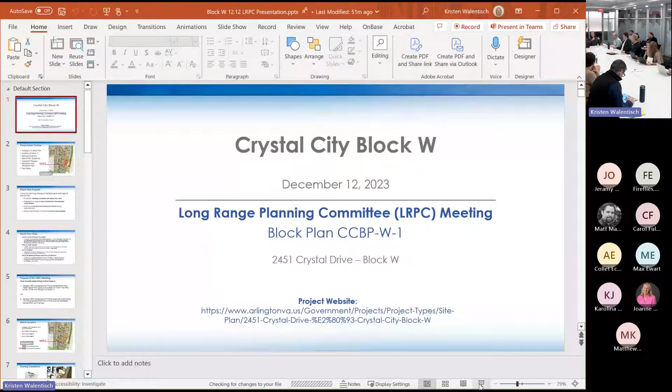Why don't we move then on to the staff's presentation for this meeting? We have one more person who came in—introduce yourself. Thank you. Okay, staff, it's all yours.

Okay, great. Thank you, Commissioner Lantelmi. All right, so we are here to look at the block plan for Crystal City Block W.

Prior to the outline for staff's presentation for this evening, we'll look at the purpose of the block plan, the location of Block W specifically, existing conditions on the site, sector plan guidance, the applicant's development proposal, deviations from the sector plan, and next steps, timeline, and schedule.

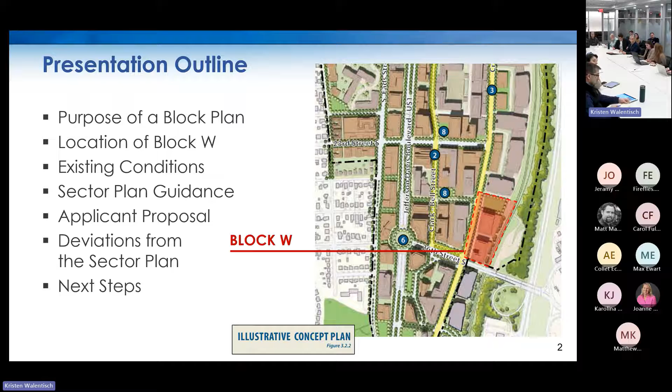You can see in the illustrative concept plan from the sector plan that Block W is located in the shaded area. We'll have a little more information on that, so I'll keep going.

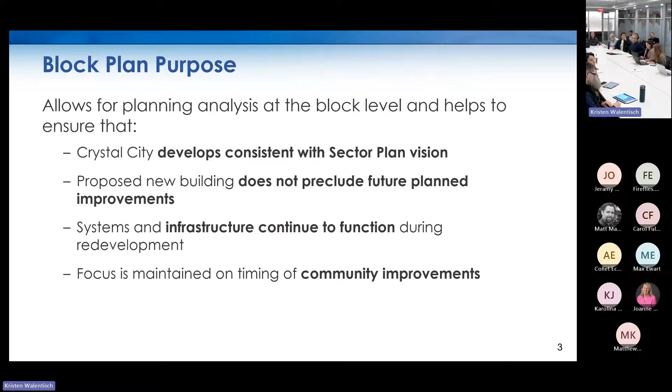Just to review, the purpose of the block plan is to allow for planning analysis at the block level and help ensure that Crystal City develops consistent with the sector plan vision. Proposed new buildings do not preclude future planned improvements. Systems and infrastructure continue to function during redevelopment, and focus is maintained on timing of community improvements.

Just to summarize this slide, what is a block plan? It's a general long-range plan for a single block in Crystal City, for properties east of Richmond Highway. Tonight we're looking at very general aspects of the block plan, mostly related to open space and transportation. There will be a corresponding SPRC process after this LRPC process, which will include more site-specific recommendations. This block plan is required because it's east of Route 1 in Crystal City and is required by the sector plan.

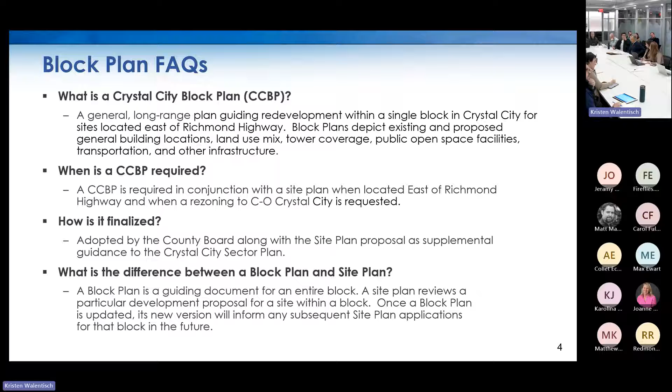For tonight, interpret this loosely: LRPC should be working towards determining whether there is either A, general consensus that the proposed block plan meets the sector plan goals and is ready to inform the SPRC, or B, consensus that there are major issues outstanding with the proposed block plan. This is not black or white. One is not meant to give a green light for the project, and the other is not meant to completely halt it. But generally we want you thinking of one of these two options while you review the proposals tonight.

Looking at the block plan location, it is in the South End district within the sector plan. It's east of Richmond Highway, north of 26th Street, south of 23rd Street, and it is identified as an anticipated redevelopment site in the sector plan.

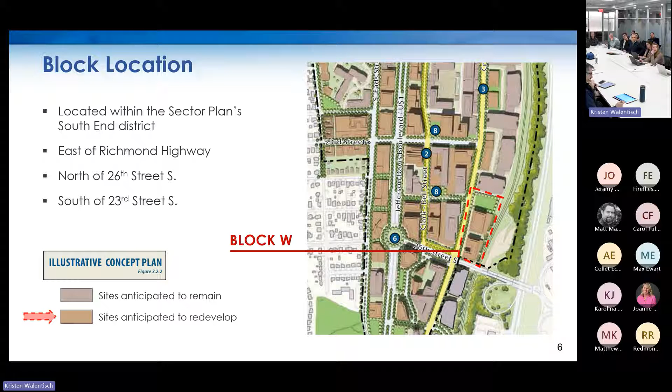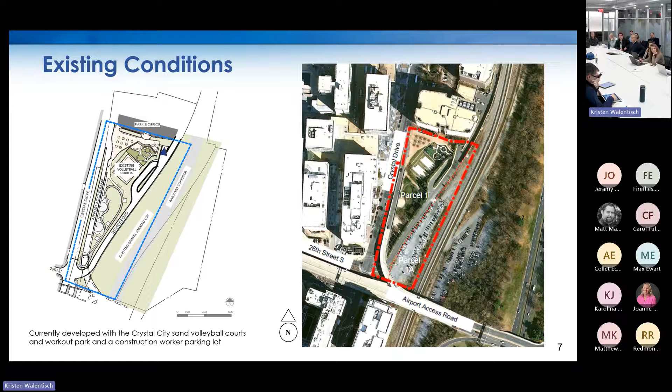The existing conditions: this is the site of the existing Crystal City sand volleyball courts you may be familiar with. There are also additional workout features and a workout park on this site. There is a service road that cuts through mostly the center of it, running north to south. And there is an underground tunnel that connects to a parking lot that JBG owns, manages, and maintains, used for construction worker parking. We can look at that in more detail.

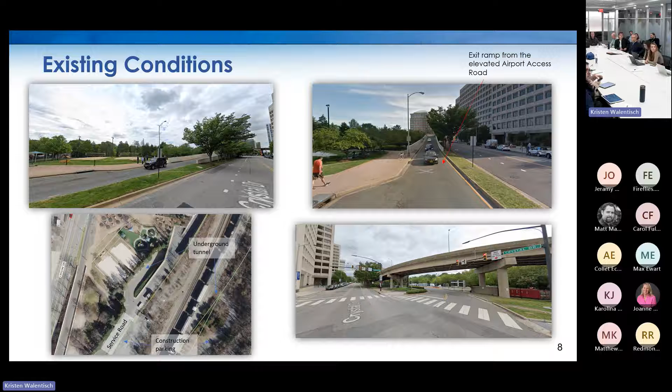Photos of the site, going clockwise from the upper left: you can see the sand volleyball courts. In the next image, the exit ramp of the airport access road that is above grade, coming to grade as it reaches Crystal Drive. In the lower right corner, you can see that airport overpass, elevated, with the service road going underneath it. In the lower left image, that's an aerial view of the service road as it connects to the underground tunnel, which goes under the railroad tracks, as well as the construction worker parking on both sides of the railroad tracks.

For the development proposal: it's a rezoning to CO Crystal City block plan, as we looked at, and why that's required. A site plan amendment to remove some of the site area for Block W from site plan 167, as well as a new site plan for a 7-story mixed-use building with 370 residential units and about 3,000 square feet of ground floor retail.

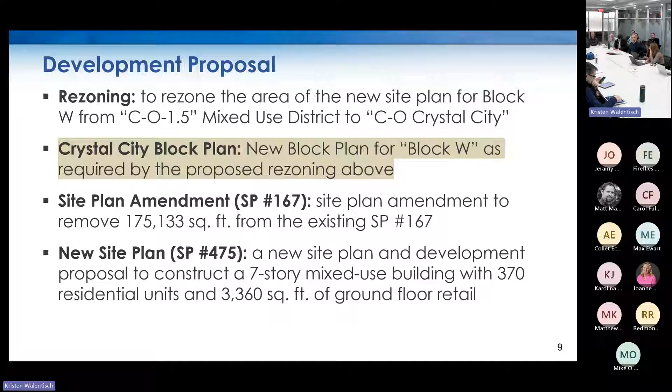Looking at that in a bit more detail, some of the development tabulations of note here: the parking ratio is about 0.5 spaces per unit, and the proposal includes provision of open space of about 35,000 square feet.

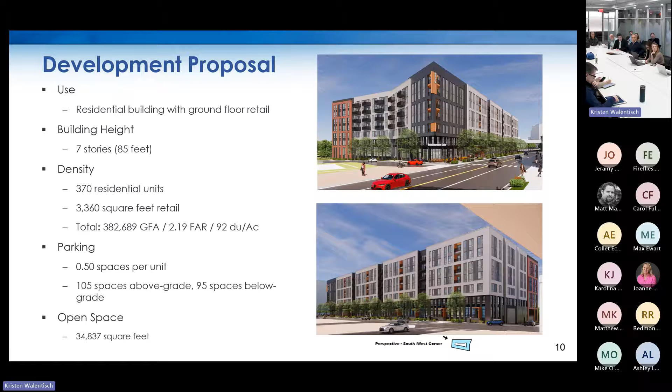Moving into sector plan guidance for the building heights map, the sector plan permits a maximum building height of 200 feet here. The proposal is at about 85 feet, so it's not a deviation from the sector plan guidance, but there is a large difference between the proposed and the recommended.

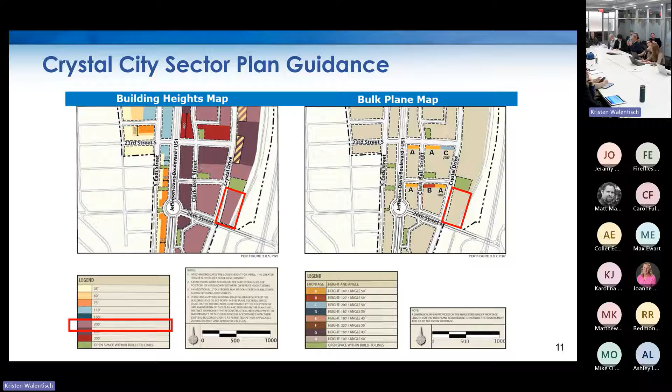Looking at the bulk plane angle map, there is no recommendation specific to the site. For the build-to lines, the sector plan shows a 115-foot building face-to-face distance, however at certain pinch points, 98 feet is permitted. And for street network, there is a type A retail-oriented and mixed-use oriented arterial street along the Crystal Drive frontage adjacent to the project site.

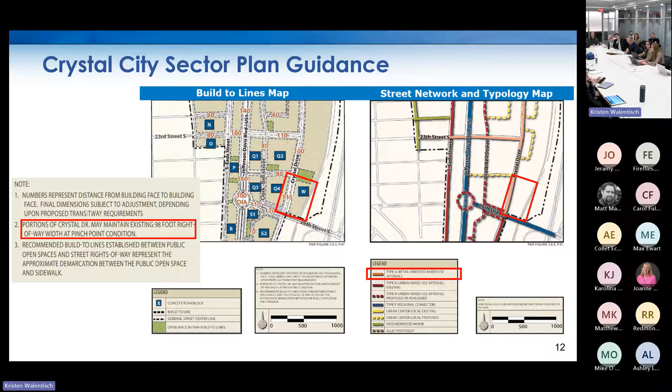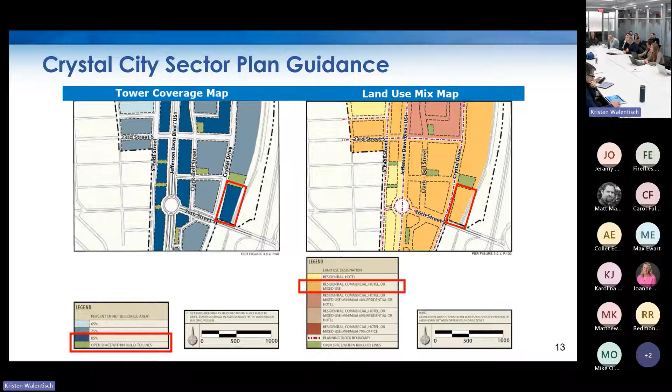For tower coverage, the sector plan prescribes 85% of the net buildable area. And for land use mix: residential, commercial, hotel, or mixed use.

For public open space, you can see there is an open space. It's hard to see from here, but that's public open space number 13 in the sector plan, which is Crystal Park. On the slide that follows this, a bit more detail on that. And for retail frontage, the northwest corner of any proposed building on Block W does require retail on that location.

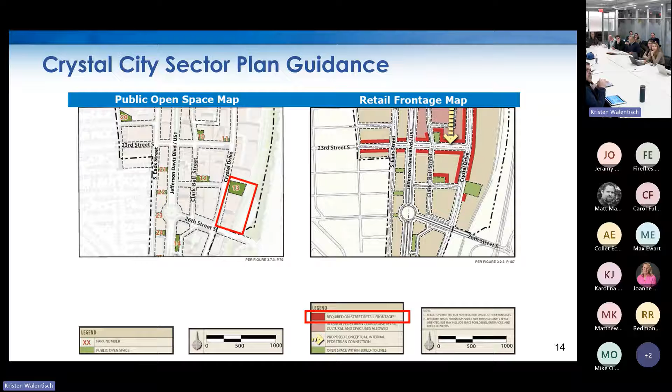Looking a little more at the open space, you can see the illustrative plan from the sector plan as well as some of the policy requirements, which includes meeting a minimum open space area of 38,000 square feet. This site also currently includes a childcare center playground, so we will have to discuss the relocation or reincorporation of that into the park at some point if that's decided. The active uses were mainly recreational for the park use.

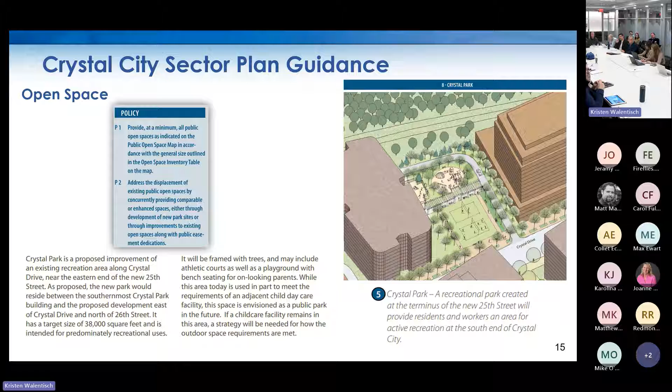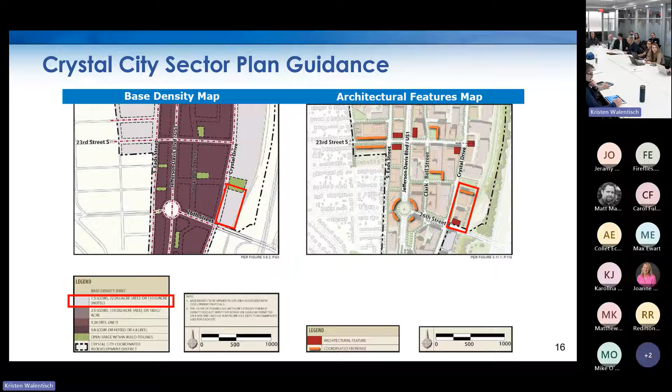Looking at architectural features, the sector plan prescribes a coordinated frontage on the northern facade facing the open space and an architectural feature on the south. The sector plan defines an architectural feature as something that can range from a special corner treatment to a complete building tower. A coordinated frontage is described as something that should mutually respond in massing, materials, and architectural language to visually unify the common space or street they frame.

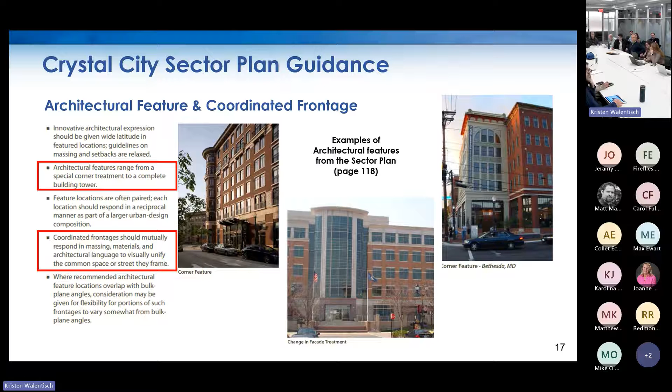We will be discussing both of these aspects more at the SPRC level, since they are more architecture and site specific. Just want to flag it for you now. That is the recommendation sector plan.

Looking at the surface transitway map, the sector plan does envision a proposed transit stop in the northwest corner of Block W. And looking at the service and loading map, the sector plan does identify the eastern frontage, which is the side of the building adjacent to the railroad tracks, as the generally preferred frontage where loading, service, and garage entrances are located on a street. So that's to note because we'll be looking a lot at that this evening.

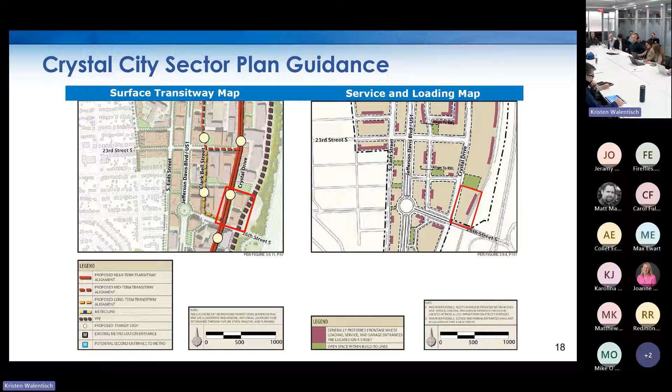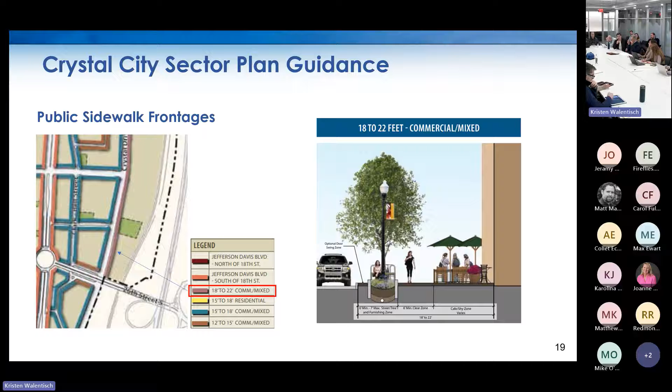Finally, for public sidewalk frontages, the sector plan prescribes 18 to 22 foot width along Crystal Drive for commercial and mixed use. I'll pass it over to my colleague, Matt Matuzik, to look at the sector plan deviations.

Thank you. Good evening, everybody. This is actually a great starting point that the entire review process can be based on. Given everything you just heard, where does staff see any kind of deviations in front of us to what the sector plan is anticipating in that particular block and on this site. So on the next two slides, we wanted to give you a very robust and comprehensive summary of our assessment right now of that proposal, and then go into specific details of the key deviations we wanted to highlight for this discussion.

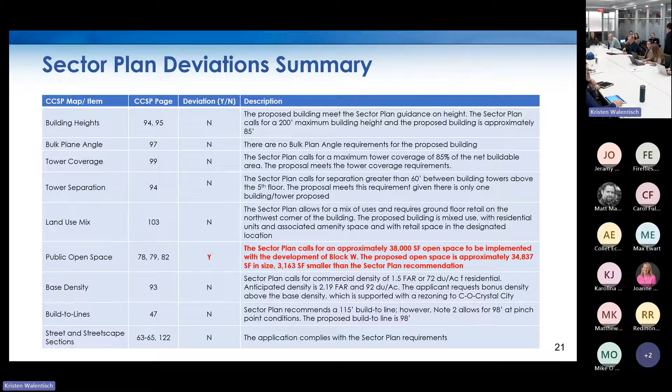I'm not going to read through all of these, particularly at that scale, but the ones in red are where the deviations occur. You'll see a yes in that third column. On this slide, the open space deviation we have is fairly minor, more of a size issue. There's obviously the intent of meeting the open space requirement. We want to verify that the sector plan anticipates a certain size, and can we make further evolutions to the design to ensure that this can still be achieved. On the next slide, we have several others that deal with the transportation side of the equation, both from a loading, transit, and street network perspective.

So in some sense, we're having a conversation that at the same time could happen at the SPRC level. But beyond the requirements of conducting, reviewing, and approving a block plan here, we want to make sure that if there are any fundamental issues we think should be addressed, that happens now, so that when the SPRC process begins, it has a much better starting point, and some of these items are more in alignment between the county, the community, and the proposal. We want to start that conversation and see where we go after this evening.

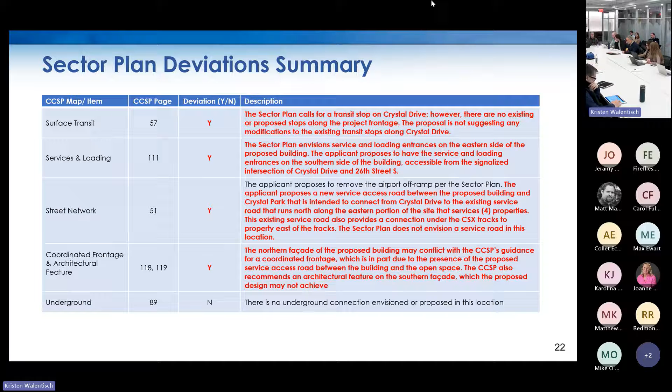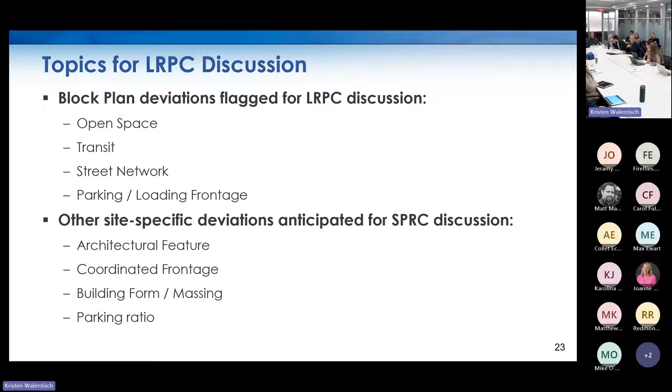The next couple of slides get into the specifics of some of these items we mentioned. We're not going to cover all of them because, as Kristen mentioned, a lot of these are meant to be SPRC site specific, but to the extent we can cover the transportation and public space elements that typically speak to the block level assessment, we wanted to accomplish that tonight. So I'm going to cover the first one, which is open space.

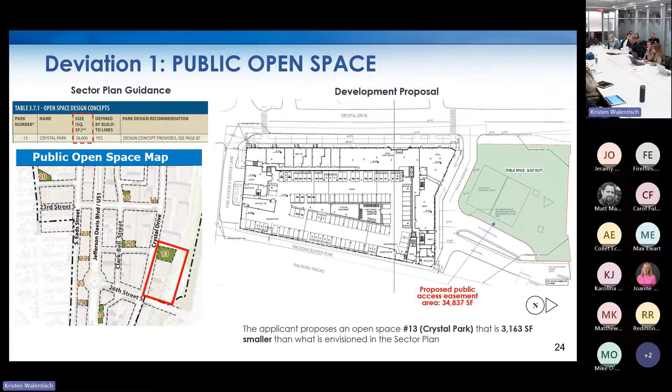You can see the comparison, the same exhibit we showed earlier, with the planned open space and what is currently proposed with the application in front of us. There's a minor deviation in the total square footage of the area, given where the additional service road is introduced from Crystal Drive. Sergio is going to cover the next couple of slides dealing with those transportation related deviations.

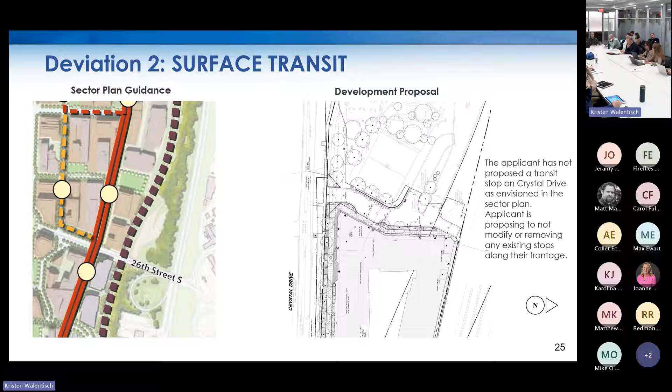Thanks, Matt. So the first deviation is about surface transit. The Crystal City sector plan calls for a transit stop along Crystal Drive, adjacent to the site. The applicant has not proposed a transit stop there. It's also not modifying or removing any existing stops along Crystal Drive along its frontage.

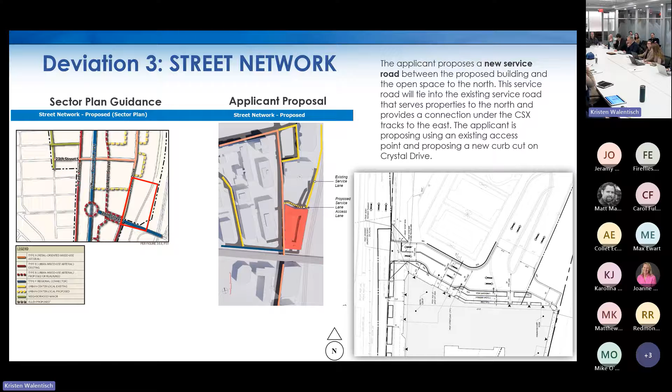And lastly, the Crystal City sector plan calls for loading and garage entrances to be on the eastern frontage of the site. The applicant has proposed its services to be on the southern frontage, with access through a signalized intersection that exists at Crystal Drive and 26th Street South.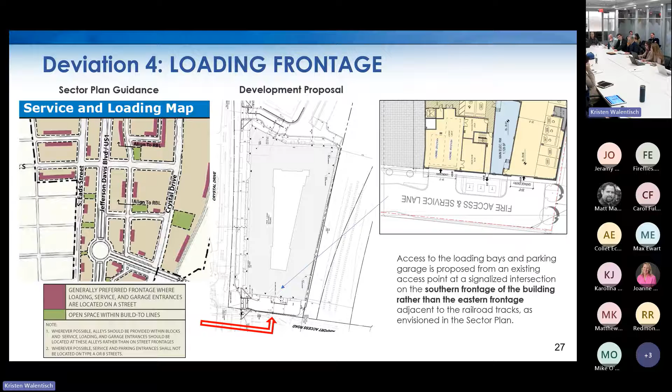So that concludes staff presentations. We'll turn it over to the applicant team to present.

I'm going to go to the next slide. I think we'll probably have very similar images, Chrissy, in terms of the site context, so please bear with me, you'll be very well aware of what's going on by the end of this presentation. As we mentioned, Block W is located on the southern end of Crystal City, on Crystal Drive, north of 26th Street and south of 23rd Street. It contains essentially, as Matt mentioned, one development site within the block, as well as Crystal Park to the north.

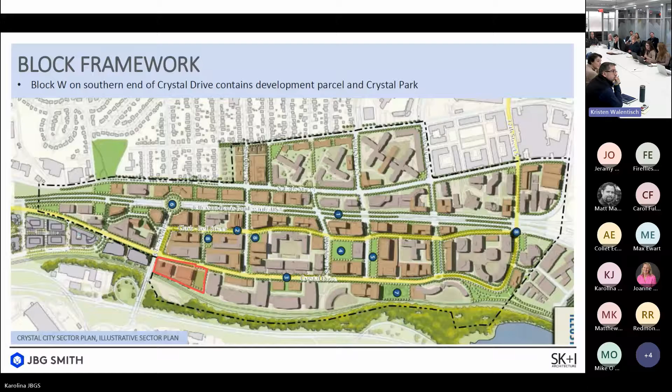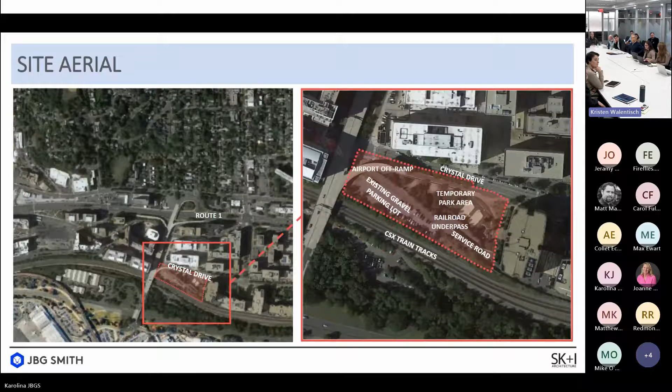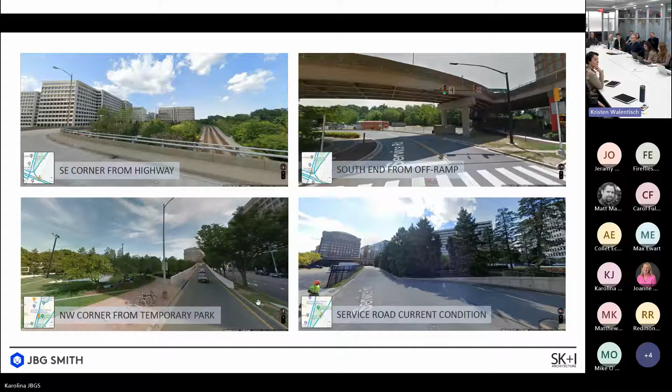Here we have some pictures of the site context. Similar to what Steph mentioned, you have the corner from the highway, the southeast corner you see there, currently over our site. On the right-hand side, you see the south end off-ramp where our loading will be located, or we're proposing it to be located. You see the northwest corner where the temporary park is, and then the service road currently and the condition there.

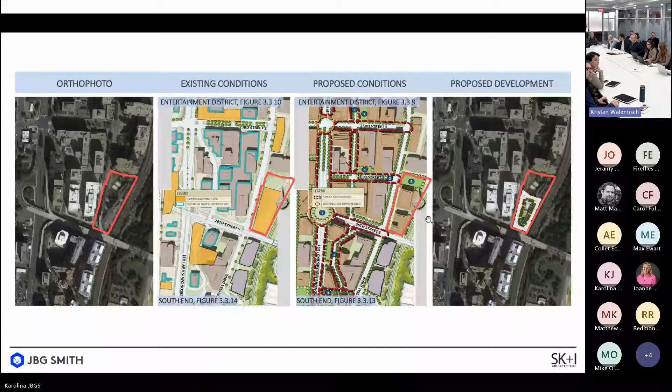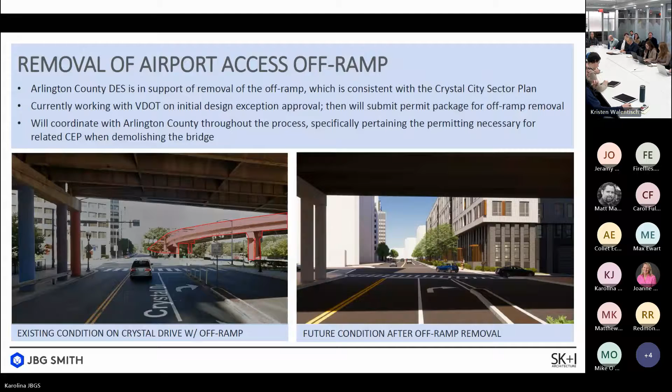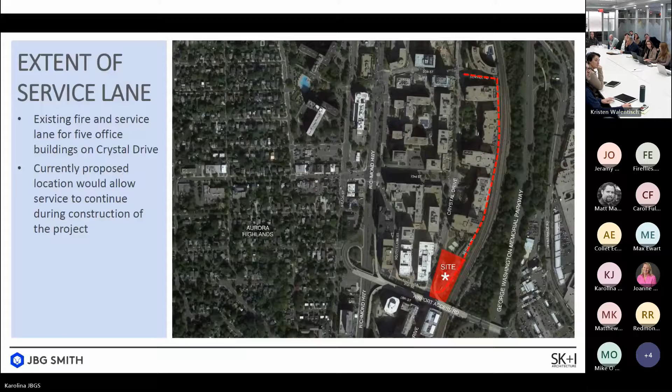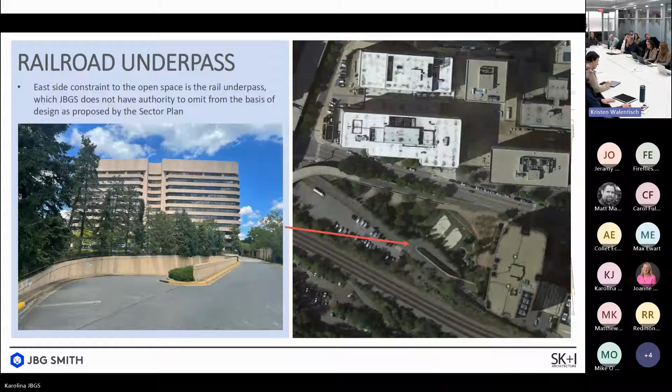Another constraint we have is this railroad underpass. It's one of the eastern constraints, and it's an interesting one—it's something JBG does not have the ability to totally omit. There are multiple parties that have rights protected for that underpass, so that's something we have to take into consideration during the design phase.

So we have here, which we thought was helpful to showcase, some of these constraints within the current site arrangement. You'll see the service road cutting through our site, the underpass in green, and two other variables we haven't talked about yet but will include in the next slides: the Pepco duct bank that feeds the airport, an existing duct bank we have to deal with, and the railroad tracks with the variable width and buffer—making sure as CSX continues to develop their plans that we're cognizant and in coordination with that.

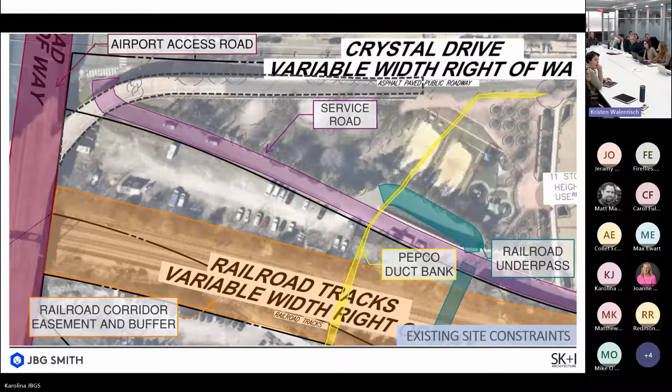So this is our proposed plan within the current constraints of the site, really thinking through what is possible within this space. And the one thing we added here is the open space component.

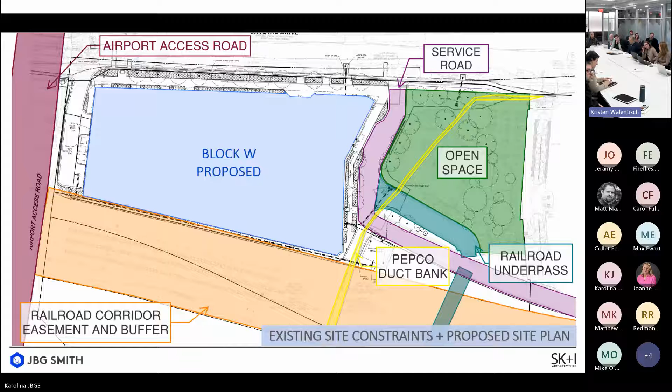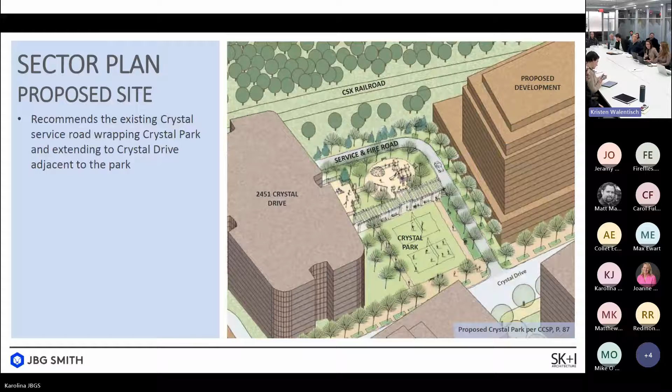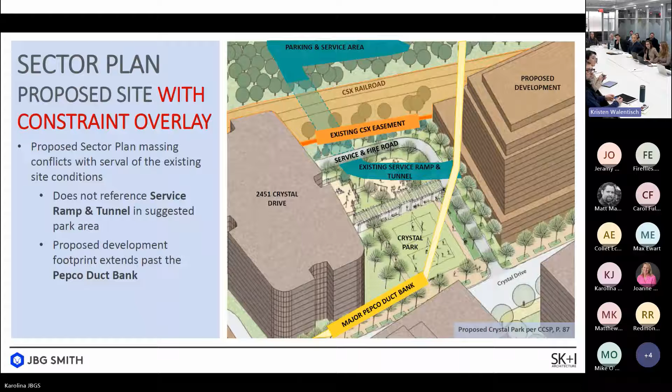If you go to the next slide, Karolina, what you'll see is the sector plan's proposed site, the illustrative nature of it, where we studied quite a bit in terms of the service and fire access and where it was intended to be. And if we overlay our current constraints within the site with the sector plan's vision, you can see it starts to get complicated between what's currently there today and what the sector plan actually envisioned.

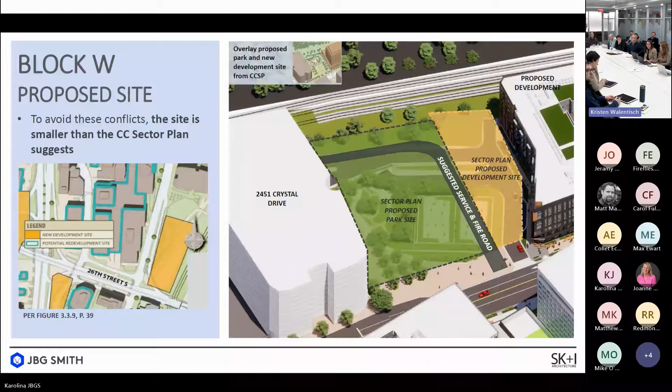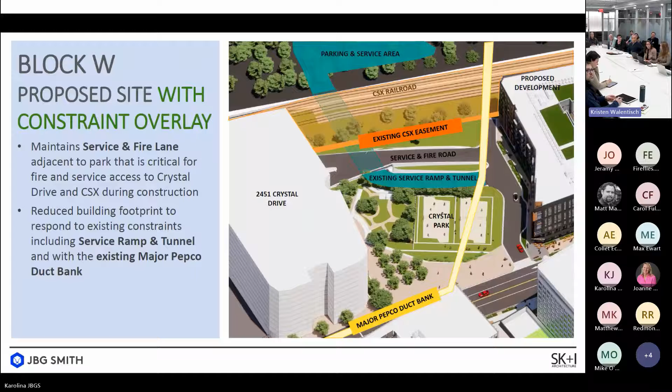In order to accommodate for the constraints and ensure that we are providing as much open space as possible, we are proposing to push our development to the south to ensure access to the open space, but also to clear some of the constraints we mentioned, in particular that duct bank we talked about. So you can see with the current plan we're proposing how the site lays out given those constraints.

Here we have just a rendering of our building, really highlighting the open space and hugging that component of activity on the site. It's a little hard to see here, but we heard staff comments that the open space was not enough, so we're working on a revised proposal to make sure we hit the 38.

I think the good news is that with the geometry of the northern component, we can probably include that as part of the easement and hit that 38,000. So it should not be an issue from the open space perspective.

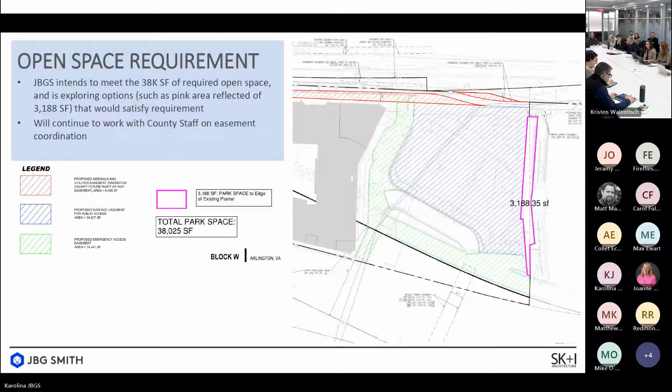From a sector plan and site building design standpoint, our building program proposes a five-over-two wood frame building, roughly 380,000 square feet, with just shy of 3,400 square feet in retail and 370 residential units. We're excited that the average unit size here is over 1,000 square feet. Some of our other properties skew smaller, so it's nice to see a different typology that allows for different tenants.

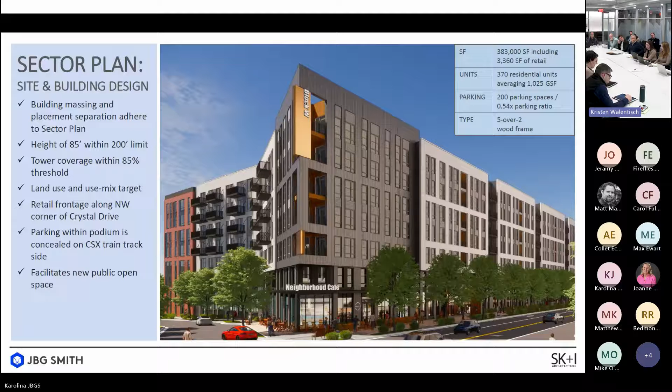Building massing and placement adheres to the sector plan in terms of height. We're at 85 within the 200 limit we talked about, and tower coverage is within the threshold of 85. We're on the mixed-use target for land use, with retail fronting Crystal Drive in the northwest corner. Finally, we have 200 parking spots, roughly a 0.54 parking ratio, placed on the east side of the site so the podium can conceal the parking and allow us to activate the street front.

From a programming perspective, we have retail in the northwest corner, and the lobby also fronts Crystal Drive so we get activity on the sidewalks. We have residential walk-up units catering to a sense of community and active space at the ground level. Walking around the building, loading and the parking entrance are to the south, and fitness is to the north, showcasing probably our most active use within the building, complementing the park on the other side.

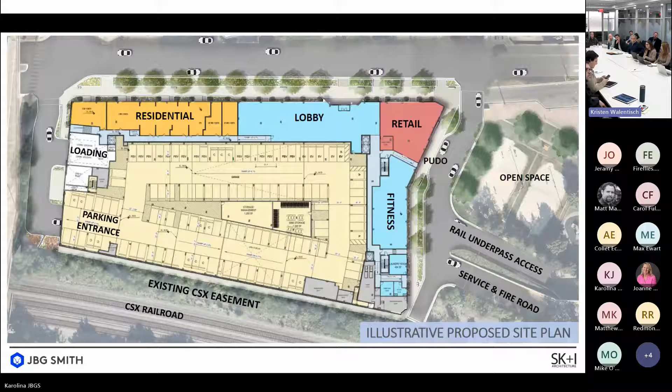Another thing to note is that we're proposing some PUDO spots off of that service drive to limit pedestrian conflict that could happen on Crystal Drive, not only with Ubers but also with bikes. I wanted to make sure to point that out.

On service and loading, we believe we're putting our loading in the best location for the site. We also took a reference from the sector plan, which suggests putting loading near alleys when possible. We have a good condition here that lets us hide some of this loading right underneath the bridge that remains when we bring down the ramp, and we believe this is in the spirit of the sector plan.

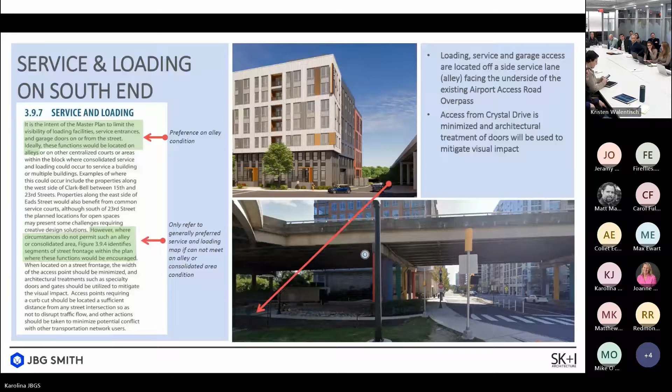Before we end, we wanted to walk you through the building. I know this is more of an SPRC topic with architecture, but we wanted to show what the building would look like from different perspectives as you walk around it. From the northwest is our coordinated frontage, then the building entrance and lobby activation on Crystal Drive. The bottom perspective is from the east facade, showing what you'd see coming in from the bridge and from the CSX train tracks in the last picture.

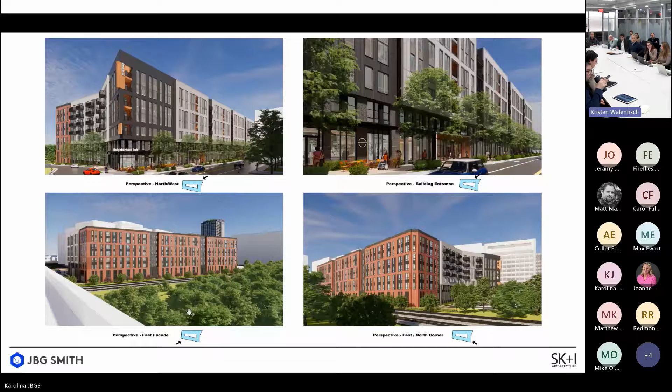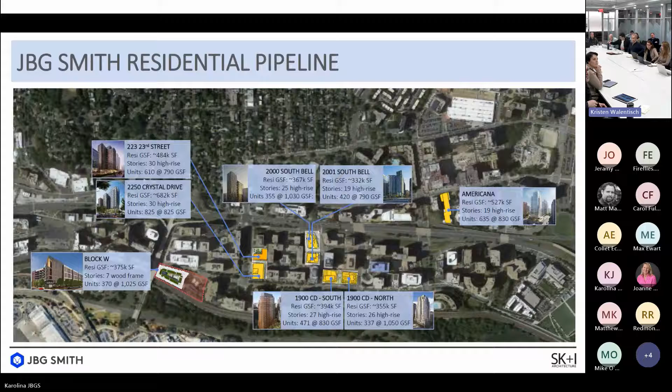Lastly, we wanted to leave you with the fact that we're excited about this plan. It's different in kind than what JBG has traditionally done. If you look at all the entitlements in the past two years, it's mainly high-rise buildings on Crystal Drive, so this really allows for a different type of housing opportunity for folks, different tenants and families alike. That's all we had.

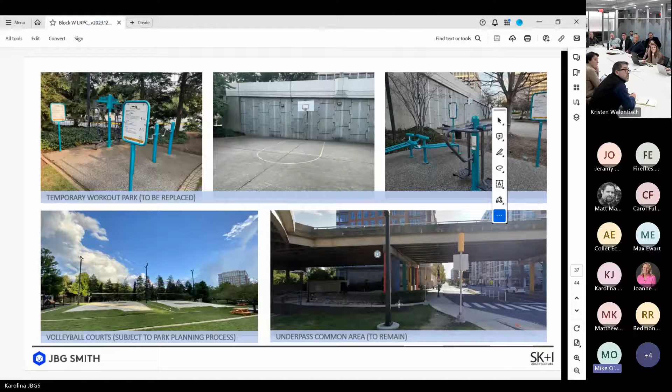Looks like the office building actually owns the land to the south. This is Mike O'Hara from Bowler. That area underneath the viaduct is part of the office building that was designed with the office building as the first building in Potomac Yard. It's a little dark, but you can see there's definitely some structure underneath.

It also is a stormwater management system, if you notice there's depth to that. And it's public space, something that is open. I walked it, it's actually quite nice even though it's underneath the highway, and there's shade. They're trying to make the best of something that's really bad, so it's a good amendment. Anyway, I just wanted to identify that that's there and how it fits into this.

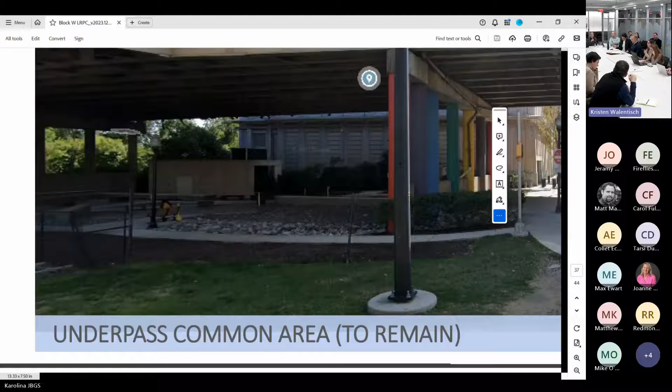I'll piggyback on that and comment that I'm not sold on the loading dock location. That'll come up a little bit later.

Comments there, Pam? Excuse me, but you have participants online. Yes, I'm a commissioner as well, may I speak? Identify who. Carol Fuller, I'm a commissioner on the Crystal City and Pentagon City Civic Association Council. Can you hear me? Yes. Okay great, so you're a substitute, right? Right, can you hear me? Yes, we can hear you.

Okay, I have two comments on open space. First, I'm very pleased to hear the applicant says they're going to try to meet that open space requirement. But I want to make clear that the CPCC is about to send a letter to the county with its revised priorities, and one of those is open space. Meeting the sector plan is fine, but we need a lot more open space because things are not moving quickly, and there is very little open space in Crystal City that does not belong to the developers. So just meeting that level is like going to silver on LEEDs rather than going to gold or platinum.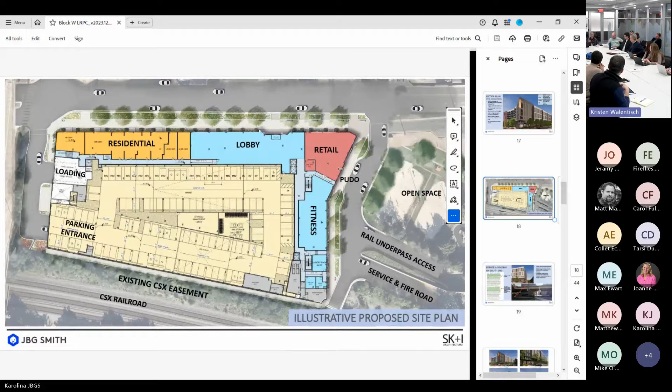So people are going to want to be dropped off on Crystal Drive. I think that's a thing to think about. We'll presumably be getting traffic counts for that part of Crystal Drive, because it's the quieter end. I was actually surprised how quiet that end of Crystal Drive is compared to just 3 blocks north, which is really active all the time.

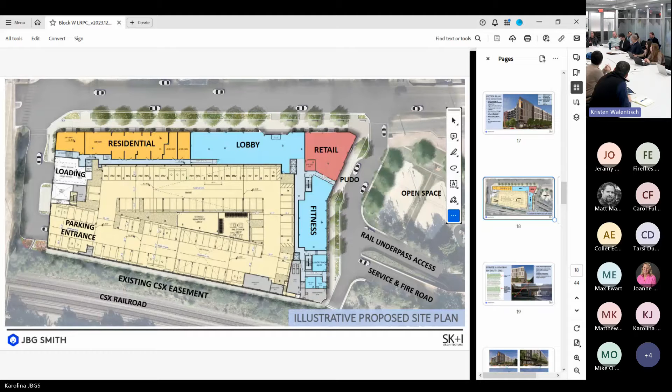Anyway, any other comments for tonight? Are we gonna talk about the architectural feature? No, that's SPRC. But if it's called for in the sector plan and they are not planning to do an architectural feature - no, that's design, that really becomes SPRC. We will definitely be, when we've had buildings in other blocks, we've had lots of time on architecture. It is definitely a big topic.

Anything else? If we don't have anything else, do we have any public speakers? For those in the chat - yeah, but I put a call out. You have like 30 seconds if you want your public comment, put yourself on the chat.

Okay, it strikes me that we pretty much have areas we definitely want to be talking about a lot more at SPRC. I think we have a relatively decent consensus that we don't have to have another LRPC, that things still need to be hammered out and will be dealt with. Is that a fair comment?

Can I do a quick Commissioner recap? This is pretty much a straight up residential use, right? And that's okay with the sector plan? Yeah, perfect. My only thing on this is that you're leaving a lot of density on the table, but that's the owner's choice. I would have loved to have seen a 20-story building - it's in a great spot for it. But again, I'm not the owner of the building.